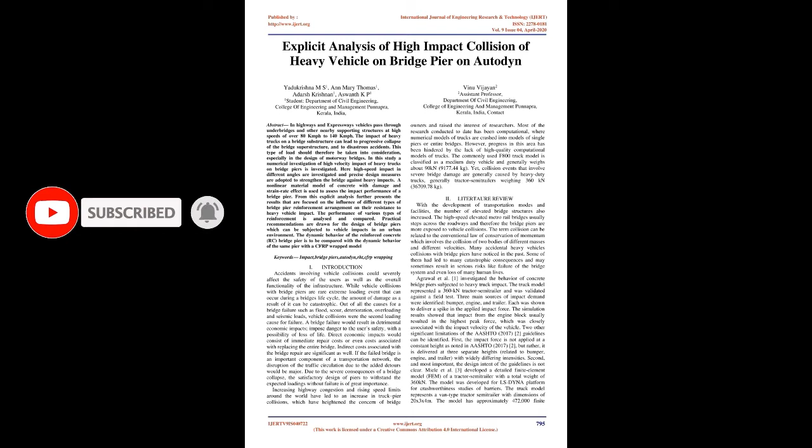Introduction. Accidents involving vehicle collisions could severely affect the safety of the users as well as the overall functionality of the infrastructure. While vehicle collisions with bridge piers are rare extreme loading events that can occur during a bridge's life cycle, the amount of damage as a result of it can be catastrophic. Out of all the causes for a bridge failure such as flood, scour, deterioration, overloading and seismic loads, vehicle collisions were the second leading cause for failure.

A bridge failure would result in detrimental economic impacts, impose danger to the user's safety, with a possibility of loss of life. Direct economic impacts would consist of immediate repair costs or even costs associated with replacing the entire bridge. Indirect costs associated with the bridge repair are significant as well. If the failed bridge is an important component of a transportation network, the disruption of the traffic circulation due to the added detours would be major.

Due to the severe consequences of a bridge collapse, the satisfactory design of piers to withstand the expected loadings without failure is of great importance. Increasing highway congestion and rising speed limits around the world have led to an increase in truck-pier collisions, which have heightened the concern of bridge owners and raised the interest of researchers.

Most of the research conducted to date has been computational, where numerical models of trucks are crashed into models of single piers or entire bridges. However, progress in this area has been hindered by the lack of high-quality computational models of trucks. The commonly used F800 truck model is classified as a medium-duty vehicle and generally weighs about 90 kN, 9,177.44 kilograms. Yet, collision events that involve severe bridge damage are generally caused by heavy-duty trucks, generally tractor semi-trailers weighing 360 kN, 36,709.78 kilograms.

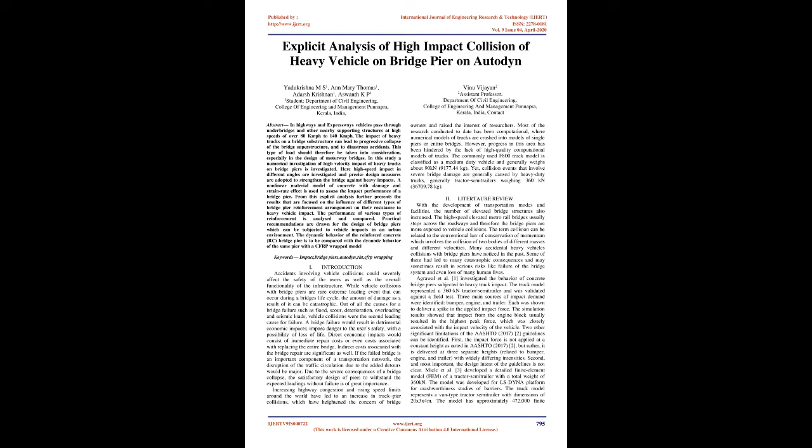2 Literature review. With the development of transportation modes and facilities, the number of elevated bridge structures also increased. The high-speed elevated metro rail bridges usually step across the roadways and therefore the bridge piers are more exposed to vehicle collisions. The term collision can be related to the conventional law of conservation of momentum, which involves the collision of two bodies of different masses and different velocities.

Many accidental heavy vehicle collisions with bridge piers have been noticed in the past. Some of them had led to many catastrophic consequences and may sometimes result in serious risks like failure of the bridge system and even loss of many human lives. Agrawal et al. investigated the behavior of concrete bridge piers subjected to heavy truck impact. The truck model represented a 360 kN tractor semi-trailer and was validated against a field test.

3 main sources of impact demand were identified: bumper, engine, and trailer. Each was shown to deliver a spike in the applied impact force. The simulation results showed that impact from the engine block usually resulted in the highest peak force, which was closely associated with the impact velocity of the vehicle.

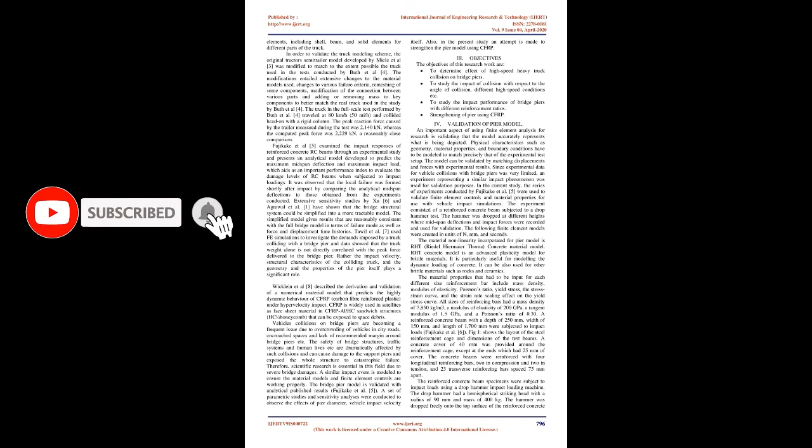Two other significant limitations of the AASHTO 2017 guidelines can be identified. First, the impact force is not applied at a constant height as noted in AASHTO 2017, but rather, it is delivered at three separate heights, related to bumper, engine, and trailer, with widely differing intensities. Second, and most important, the design intent of the guidelines is not clear.

Miele et al. developed a detailed finite element model, FEM, of a tractor semi-trailer with a total weight of 360 kN. The model was developed for the LS-DYNA platform for crashworthiness studies of barriers. The truck model represents a van-type tractor semi-trailer with dimensions of 20 x 3 x 4 m. The model has approximately 72,000 finite elements, including shell, beam, and solid elements for different parts of the truck.

In order to validate the truck modeling scheme, the original tractor semi-trailer model developed by Miele et al. was modified to match to the extent possible the truck used in the tests conducted by Buth et al. The modifications entailed extensive changes to the material models used, changes to various failure criteria, remeshing of some components, modification of the connection between various parts and adding or removing mass to key components to better match the real truck used in the study by Buth et al.

The truck in the full-scale test performed by Buth et al. [4] traveled at 80 km per hour (50 mph) and collided head-on with a rigid column. The peak reaction force caused by the trailer measured during the test was 2,140 kN, whereas the computed peak force was 2,229 kN, a reasonably close comparison.

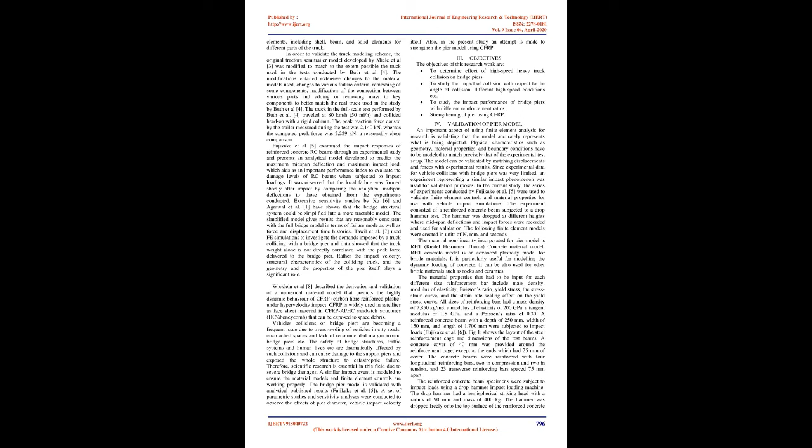Wicklein et al. [8] described the derivation and validation of a numerical material model that predicts the highly dynamic behavior of CFRP, carbon fiber reinforced plastic, under hypervelocity impact. CFRP is widely used in satellites as face sheet material in CFRP-Al/HC sandwich structures, HC being honeycomb, that can be exposed to space debris.

Vehicle collisions on bridge piers are becoming a frequent issue due to overcrowding of vehicles on city roads, encroached spaces, and lack of recommended margin around bridge piers, etc. The safety of bridge structures, traffic systems, and human lives is dramatically affected by such collisions, which can cause damage to the support piers and expose the whole structure to catastrophic failure. Therefore, scientific research is essential in this field due to severe bridge damages.

A similar impact event is modeled to ensure the material models and finite element controls are working properly. The bridge pier model is validated with analytical published results, Fujikake et al. [5]. A set of parametric studies and sensitivity analyses were conducted to observe the effects of pier diameter and vehicle impact velocity. Also, in the present study an attempt is made to strengthen the pier model using CFRP.

3. Objectives. The objectives of this research work are: to determine the effect of high-speed heavy truck collision on bridge piers; to study the impact of collision with respect to the angle of collision, different high-speed conditions, etc.; to study the impact performance of bridge piers with different reinforcement ratios; strengthening of the pier using CFRP; and validation of the pier model.

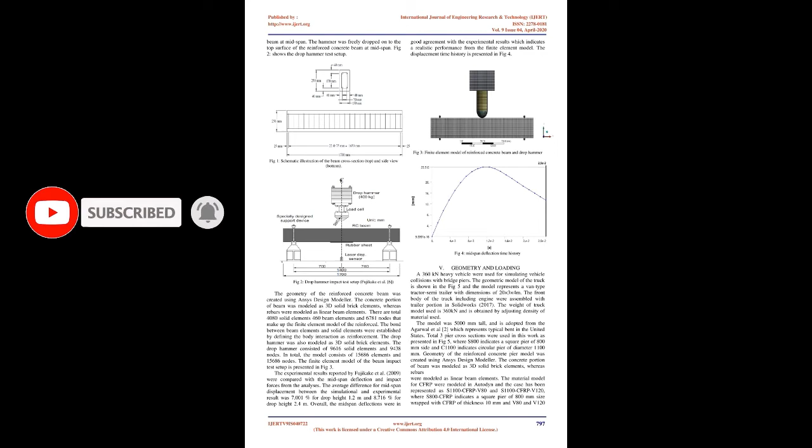An important aspect of using finite element analysis for research is validating that the model accurately represents what is being depicted. Physical characteristics such as geometry, material properties, and boundary conditions have to be modeled to precisely match the experimental test setup. The model can be validated by matching displacements and forces with experimental results.

Since experimental data for vehicle collisions with bridge piers was very limited, an experiment representing a similar impact phenomenon was used for validation purposes. In the current study, the series of experiments conducted by Fujikake et al. [5] were used to validate finite element controls and material properties for use with vehicle impact simulations. The experiment consisted of a reinforced concrete beam subjected to a drop hammer test. The hammer was dropped at different heights where midspan deflections and impact forces were recorded and used for validation.

The following finite element models were created in units of N, mm, and seconds. The material nonlinearity incorporated for the pier model is the RHT, Riedel-Hiermaier-Thoma, concrete material model. The RHT concrete model is an advanced plasticity model for brittle materials. It is particularly useful for modeling the dynamic loading of concrete. It can also be used for other brittle materials such as rocks and ceramics.

The material properties that had to be input for each different size reinforcement bar include mass density, modulus of elasticity, Poisson's ratio, yield stress, the stress-strain curve, and the strain rate scaling effect on the yield stress curve. All sizes of reinforcing bars had a mass density of 7,850 kg per cubic meter, a modulus of elasticity of 200 GPa, a tangent modulus of 1.5 GPa, and a Poisson's ratio of 0.30.

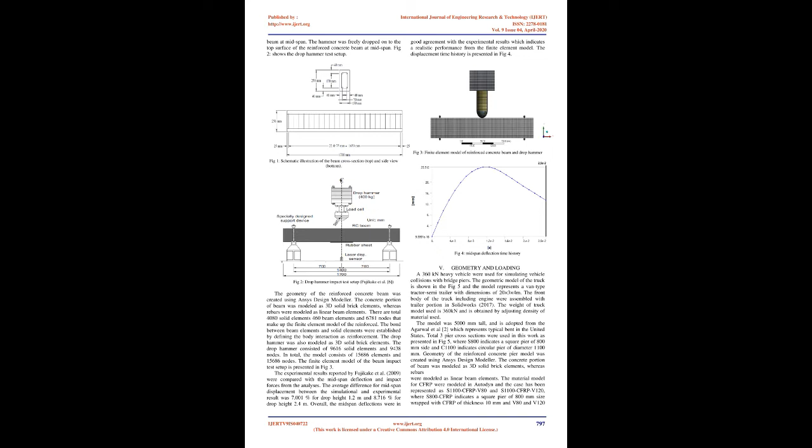A reinforced concrete beam with a depth of 250 mm, width of 150 mm, and length of 1,700 mm was subjected to impact loads, Fujikake et al. [6]. Fig. 1 shows the layout of the steel reinforcement cage and dimensions of the test beams. A concrete cover of 40 mm was provided around the reinforcement cage, except at the ends which had 25 mm of cover. The concrete beams were reinforced with 4 longitudinal reinforcing bars, 2 in compression and 2 in tension, and 23 transverse reinforcing bars spaced 75 mm apart. The reinforced concrete beam specimens were subjected to impact loads using a drop hammer impact loading machine.

The drop hammer had a hemispherical striking head with a radius of 90 mm and mass of 400 kg. The hammer was dropped freely onto the top surface of the reinforced concrete beam at midspan. Fig. 2 shows the drop hammer test setup.

The geometry of the reinforced concrete beam was created using ANSYS Design Modeler. The concrete portion of the beam was modeled as 3D solid brick elements, whereas rebars were modeled as linear beam elements. There are a total of 4,080 solid elements, 460 beam elements and 6,781 nodes that make up the finite element model of the reinforced beam. The bond between beam elements and solid elements was established by defining the body interaction as reinforcement.

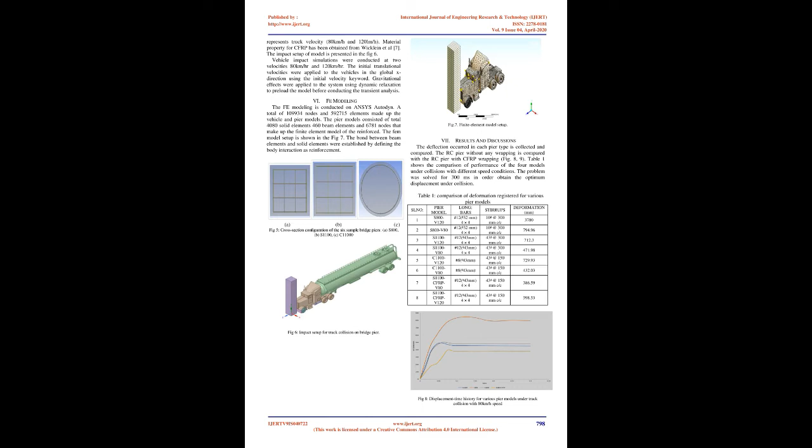The material model for CFRP was modeled in Autodyn, and the cases have been represented as S1100 CFRP V80 and S1100 CFRP V120, where S800 CFRP indicates a square pier of 800 mm size wrapped with CFRP of thickness 10 mm, and V80 and V120 represent truck velocity, 80 km/h and 120 km/h. Material property for CFRP has been obtained from Wickline et al. 7. The impact setup of the model is presented in Fig. 6.

Vehicle impact simulations were conducted at 2 velocities, 80 km/h and 120 km/h. The initial translational velocities were applied to the vehicles in the global x direction using the initial velocity keyword. Gravitational effects were applied to the system using dynamic relaxation to preload the model before conducting the transient analysis.

6. FE modeling. The FE modeling is conducted in ANSYS Autodyn. A total of 109,934 nodes and 592,715 elements made up the vehicle and pier models. The pier models consisted of a total of 4,080 solid elements, 460 beam elements and 6,781 nodes. The FEM model setup is shown in Fig. 7. The bond between beam elements and solid elements was established by defining the body interaction as reinforcement.